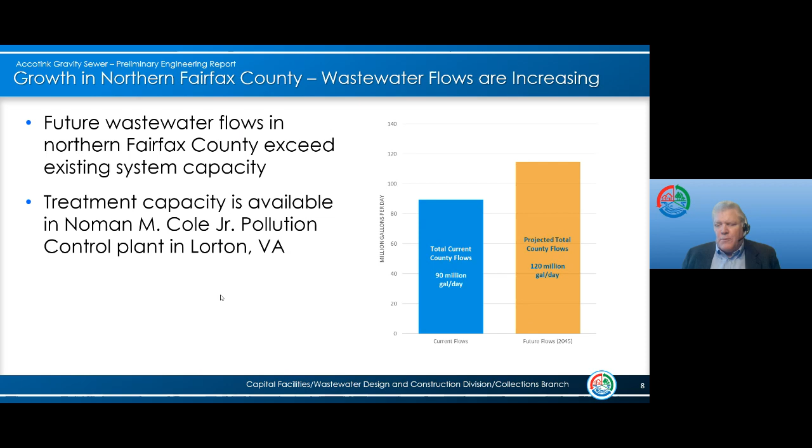So to try to deal with this growth in the Northern Fairfax County area, we're actually doing a series of projects, and we've shown them here graphically. So we have a combination of existing and new projects. Two of the existing projects we're working on are some improvements to the Difficult Run pump station, and also some improvements to the Carderock sewer located to the upper right here. Those two projects are both existing facilities.

They were in progress to have some rehabilitation done to them, and we're adding some new features just to expand the capacity of the Difficult Run pump station a little bit. And we're also making improvements to the Carderock sewer to assure that the pipe will serve us well for the planning period of this project.

We have three new projects, the Tysons East pump station, the Tysons West pump station, and the Accotink gravity sewer. Folks may have been to a recent public meeting we had on the Tysons West pump station, where we spoke specifically about that project. We'll have an upcoming meeting in the future on the Tysons East pump station. We're still getting some information together for that. But tonight we plan on focusing on the Accotink gravity sewer and discussing what that portion of this program is about.

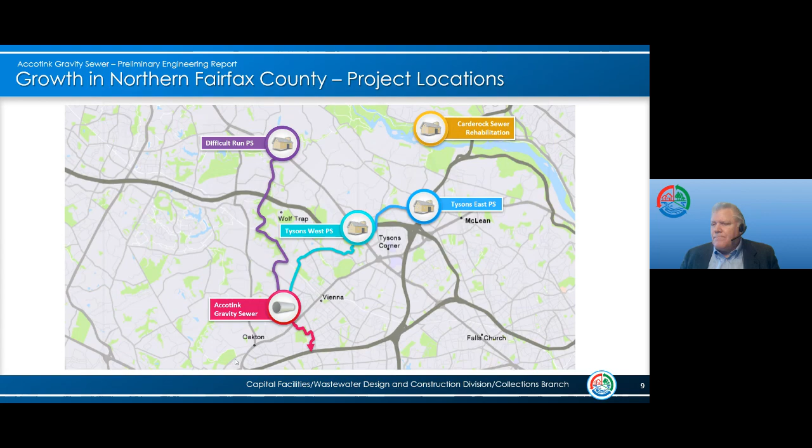So to speak more about the specific project for Accotink Gravity Sewer, I'd like to turn it over to Andrew to go into a few more details on background. Thanks, Tom. Appreciate the introduction.

I'd like to help the folks online understand a little bit more about where this project is. So the map on the left gives an approximate location. It's in the center of Fairfax County, just outside the Beltway. What we're looking at is an existing sanitary sewer, and that's what's shown on the right-hand side on the green line. The existing Accotink Gravity Sewer starts up by James Madison High School, then passes eventually through Nottoway Park, jumps out to Nutley Street, and then eventually goes through and underneath I-66 and the WMATA rail lines.

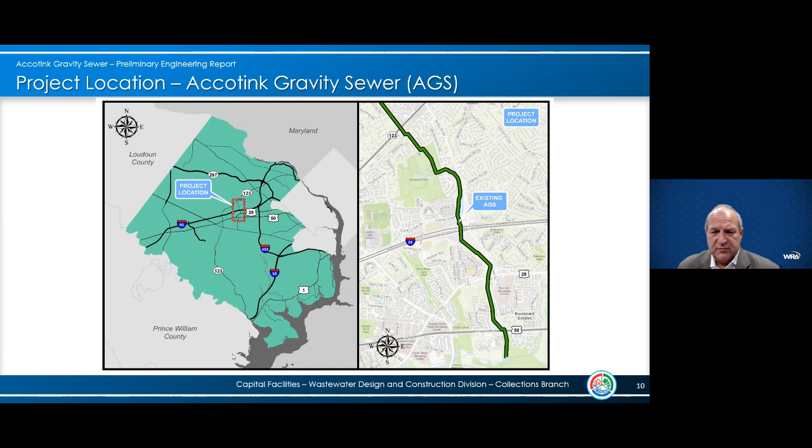As the existing sewer passes south, it follows the stream valley through and under Route 29 and then Route 50 and terminates at the Accotink Gravity Sewer near the Cross County Trail south of Route 50. This is an existing sewer. It's in play and it's been working fine, and many people walk along these routes as pathways in the stream valley. Next slide.

To orient the listeners a little bit more, the upper right-hand corner is a photograph of Nottoway Park, and what we have is a cross-country sanitary sewer, gravity sewer, that is characterized by going through some fields in Nottoway Park. As it continues south, when it jumps back into the roadways, it eventually makes its way over to Virginia Center Boulevard, just north of the metro station.

As the sanitary sewer goes underneath I-66, it follows a stream valley, and there's the photograph in the lower right-hand corner. It depicts a typical picture of where this gravity sewer is located. It's in a cleared pathway that's maintained by the county. As the sewer continues to go south, it does go underneath Route 50, and you can see that in the lower left-hand corner, and that's what the roadway is.

You can see the Hunters Branch of the Accotink Creek is in the background. You can see the culvert with manholes in the foreground that depict where the gravity sewer is located just south of the road. The line then continues down to the main branch of the Accotink gravity sewer, or the main stem. Next slide.

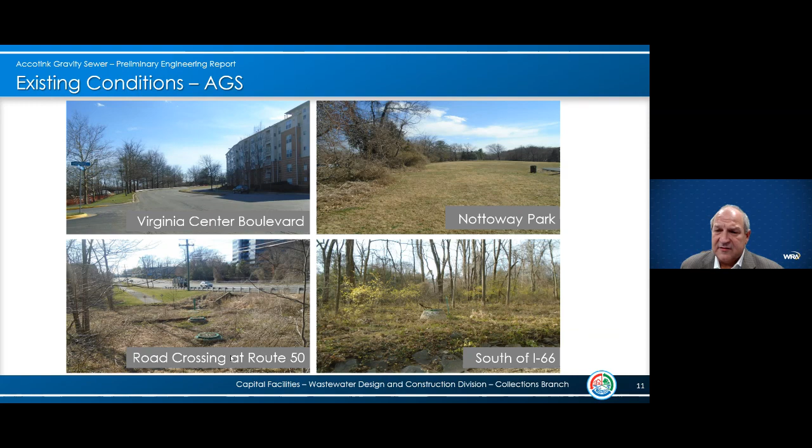So let me tell you a little bit of history of how this sewer was installed. It was originally installed in 1963. The sewer has been through some minor upgrades in 1978. And what we do understand about the sewer is that it is collecting sanitary sewer from this northern section of Fairfax County. And we have current capacity. The sanitary sewer has capacity to meet our current needs.

But as you can see in the graph on the right, the projected flow that will be coming into this gravity sewer far exceeds the current capacity. And this is the genesis of why we have to increase the capacity or increase line sizes to be able to convey flow south. Next slide.

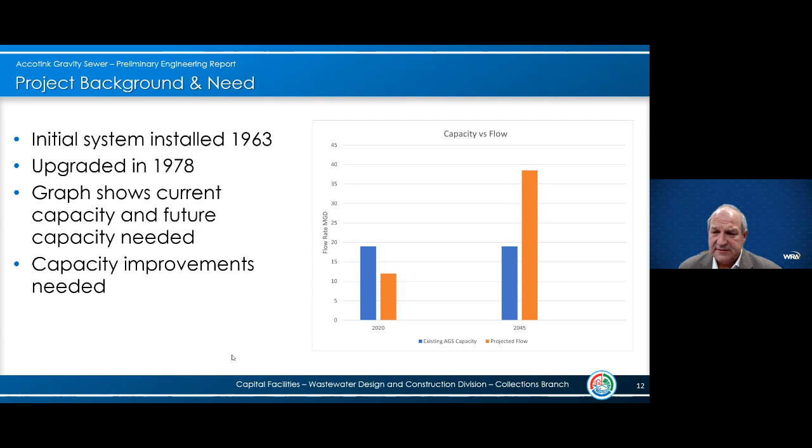So our study looked at 7 alignment alternatives, and part of doing this is to try to understand how to come up with the most effective way and most cost-effective, but also other ways to come up with alignments that don't impact the community. Out of the 7 alignments, we have 6 new alignments and 1 alignment that follows the existing line as it passes that I described earlier. The range of costs for these alignments range from 37 to 40 million.

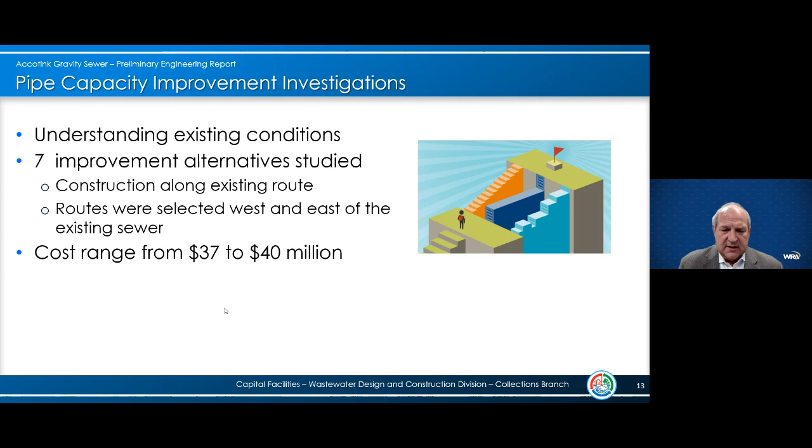When we looked at this, we tried to figure out how we understand a little bit more about these alignments. And let me go to the next graphic because it shows how these alignments compare to the existing sanitary sewer. On this graphic, you'll see a dotted green line on each of the maps that I show. And in those lines, we show the alignment alternatives that we investigated.

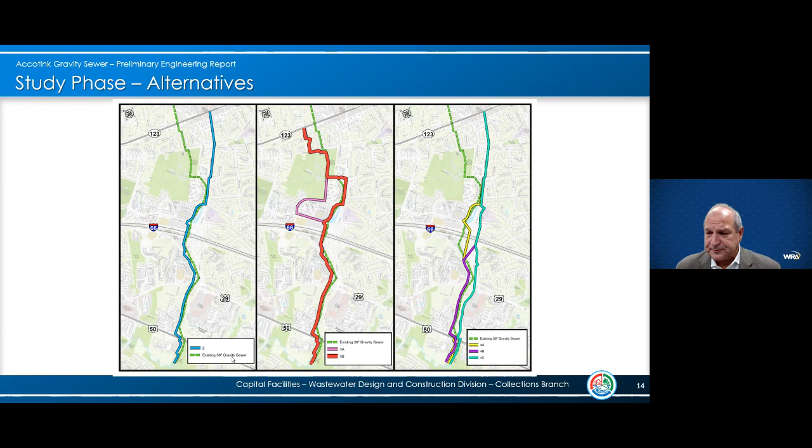All the alignment alternatives start in the north, parallel the existing sewer, and then eventually pass all the way down underneath I-66 and eventually underneath Route 50 to the main stem. You'll see a lot of crossing over of the existing line, and that's done so that during construction we can actually have flow equalization when these systems get installed together, so that we can use both lines when flow is meeting this projected amount. Next slide.

So when we have seven alternatives, how did we figure out how to look at and compare these alternatives? One of the things we looked at is we wanted to have quantifiable and qualitative data. So we looked at 8 different evaluation criteria, and they're listed across the slide that everybody sees. And they range from community impacts to hydraulic factors, constructability, environmental, land rights, utilities, and costs and stakeholders.

Out of these elements, we could start comparing and contrasting these various alignment alternatives to come up with the alignment that has the least impacts. And that's what we wanted to go through in the study and look at all the different impacts, whether it's stakeholder traffic or environmental conditions. For this group, I want to focus on 3 criteria. We can go to the next slide.

The ones I'm going to talk about include community impacts, environmental, and costs. These are just 3 examples, and they're not the only criteria we looked at, of course. But from the community side of things, we wanted to make sure the impacts to the residents' homes and businesses are minimized, so we don't cause any extraordinary problems during construction. And those problems sometimes occur with traffic and detours and noise from bypass pumping operations. When one of these alignments gets installed, we have to be able to have the sanitary sewer run continuously so that everybody can have continuous use of their systems.

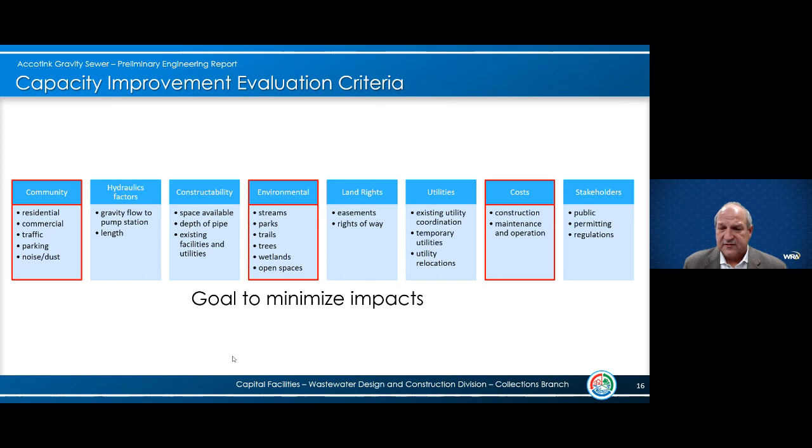So the selected alternative includes roughly 15,000 feet of new sanitary sewer. With the criteria that we looked at, we selected an alternative that is mostly found in undeveloped areas along this route. We felt that this was the least impact in many of the criteria categories that we looked at. We wanted to make sure that we stayed cross-country and paralleled the sewer in key locations so that we can have flow equalization when flow is starting to increase and we have to use capacity in both sanitary sewers. The selected alternative has many interconnections, and part of our system has to deal with bypass pumping to make sure those interconnections stay live. And we'll be talking about that in a little bit.

This system, because it's continuously operated, has to go through a series of bypass pumping, and we're going to talk a little bit about that in future slides. One thing I want to point out is our estimate is at $37 million. I mentioned before the sanitary improvements we looked at, these gravity sewer alignments range from 37 to 40. It just so happened this happened to be the lowest cost alternative.

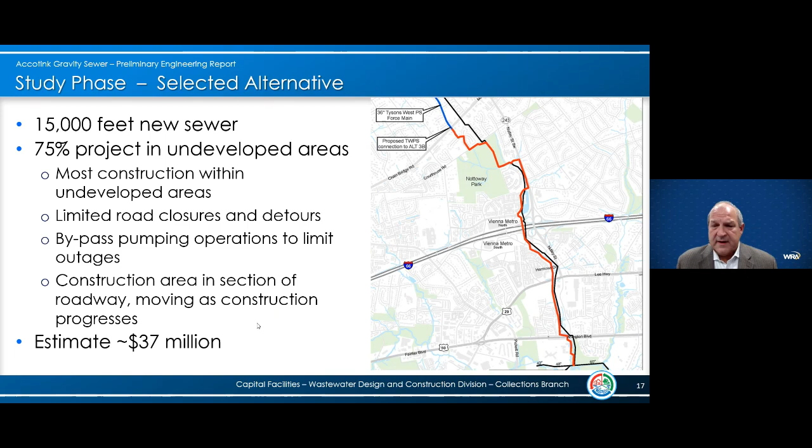Next slide. So with that selected alternative, I'm going to pass the baton back to Tom so we can talk a little bit about what's going to happen in the next phase. Thanks, Andrew.

So all of the activities that Andrew went through were some activities that we've completed to date. What I'd like to do is talk about some activities we'll be doing on the selected alternative, and these activities will be future activities for the project. So the project will be transitioning from what we call a planning phase, which was the information Andrew went through, into a design phase. And during this design phase, we'll actually be refining the route of the pipe. So while in planning we have sort of corridors, when we get into design, we'll be actually locating the specific area the pipe will be in.

So during this design phase, we'll be finalizing the sewer alignment. In order to finalize the sewer alignment, we'll be collecting a lot more specific data about the existing conditions in the area, what utilities might be present, and so on, to help us determine the best location for the pipe. As Andrew said, we'll be evaluating bypass of flow. Bypass of flow will be needed where we tie the new pipe into the existing pipe, and we need to deal with flows while we're doing that.

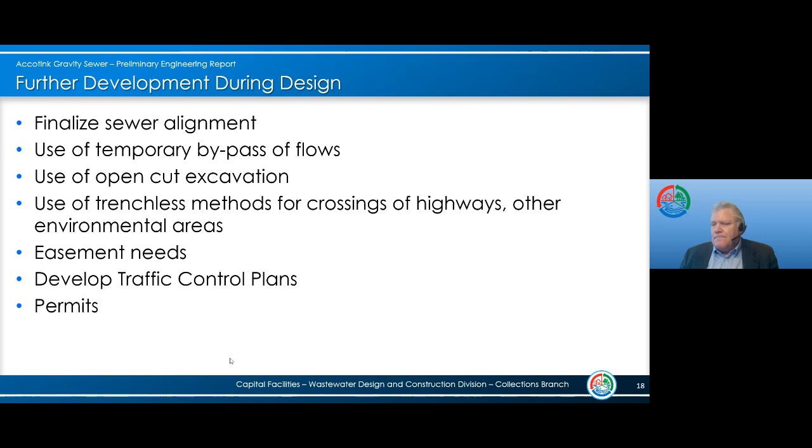What this pump does is allow flow to be pulled out of the existing sewer and allows flow to be transported to another pipe downstream, another manhole, downstream. And that gives us a bypass of an existing pipe where we can then tie a new pipe into it. So we do anticipate the need to do this sort of operation, and we'll be evaluating it carefully as we develop our design.

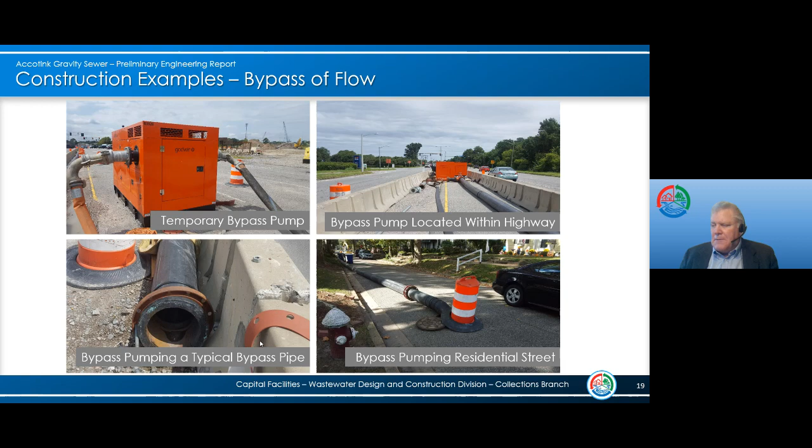A pipe is laid into the trench, and I just wanted to point out, in our case for sewer, generally our pipes are a little bit deeper. Reason for that being, for the pipe to work by gravity, we need certain alignments of the pipe.

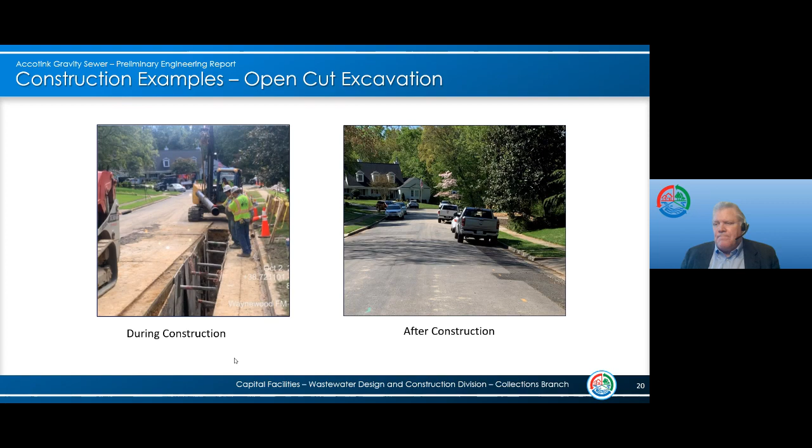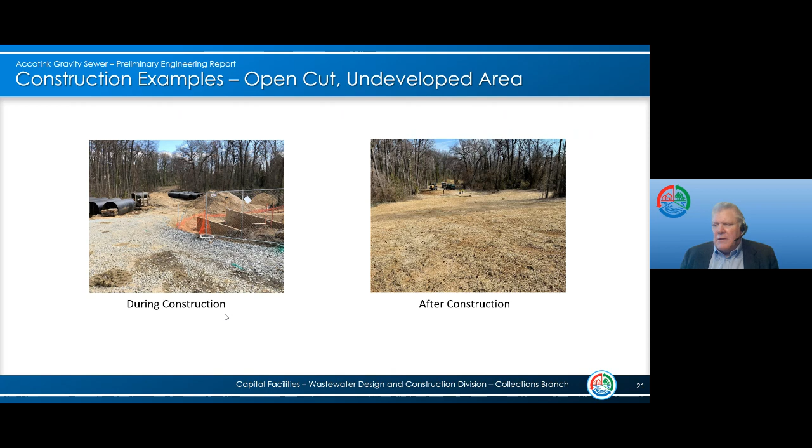And then on the right, we're just showing an example of the restoration. Once the pipe is put in, the area would be fully restored. And I'd just like to point out, this is a dormant season. You can see there's no leaves on trees. It's a little bit brown here. But once the growing season came back, the area looked really well.

The other construction method I'd like to talk about is the trenchless construction method. And with this method, it's often used possibly for very busy major roads, and sometimes used also in environmentally sensitive areas to avoid impacts. With this method, we dig 2 pits.

This method requires some careful consideration. There's some technical issues associated with it. We need to make sure the conditions are appropriate for its use. Generally, that means the soils are suitable to support this type of construction. And we also need to consider the use and scheduling of specialized contractors. So that factors into how the construction project is planned out and scheduled.

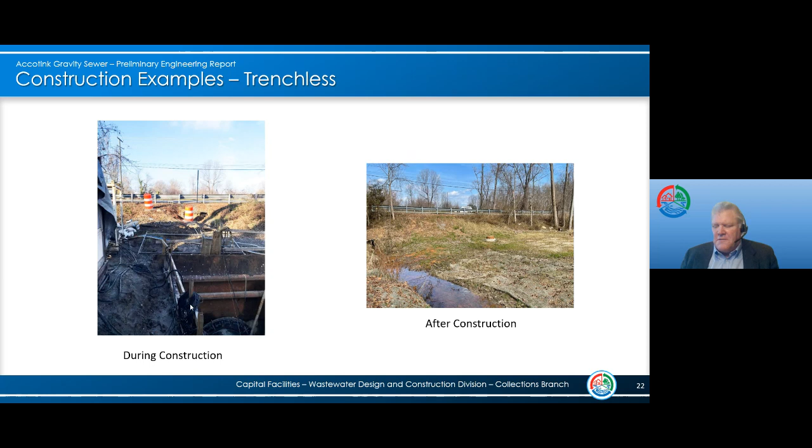Once our design is complete, we would be bidding the project out to contractors. That bid process for Fairfax County has a bit of administration associated with it. We advertise our projects publicly for bid. So that process would take us out to approximately fall of 2023 to award a construction project.

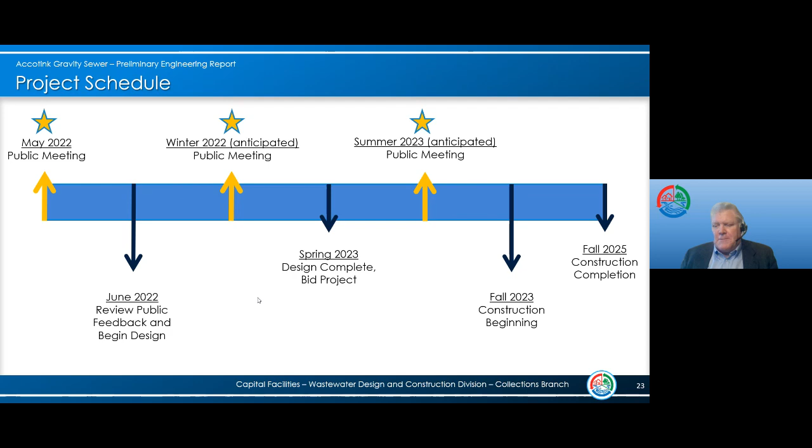So to summarize our presentation tonight, I'd like to review a few things. One is that the project is necessary. I think as we showed in our slides regarding capacity and growth in the county, we've demonstrated that there is a need for future capacity to assure proper sewage transport in the area. The project's needed now. I think our project schedule shows that these large projects take time to implement, and we want to make sure we get the project in good shape so that it's ready to handle the future capacity needs, and that really makes the project essential. So in order to prepare the sewer system for the future needs, we really need to go forward with this project.

We reviewed some next steps in the project. One aspect we discussed tonight was the design development and the time we'll be taking to finalize the route of the pipe. So that will be some future activities we're working on. During that process, we'll continue with our public outreach program. And with that public outreach program, we'd like to get an understanding of concerns people may have and incorporate those issues into our project to mitigate potential impacts. So at the project conclusion, that would be when the construction is complete, this project will accommodate capacity needs for future growth in northern Fairfax County. And that's our presentation tonight. I will turn it back over to Ellen.